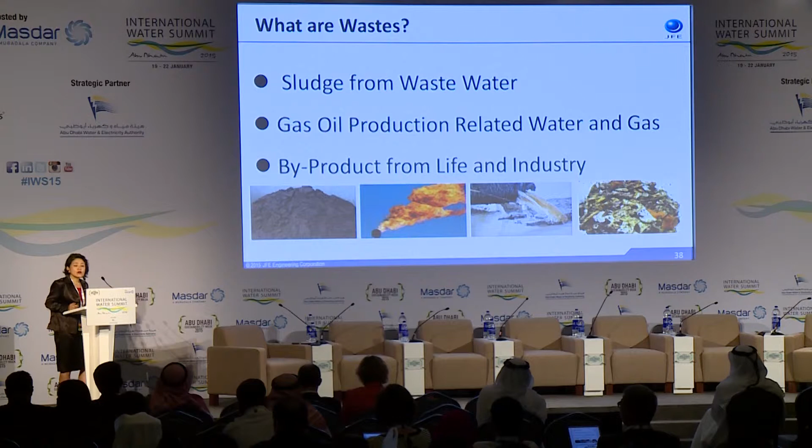So here I'd like to share with you what wastes are, as a concept in my presentation. First, sludge from wastewater. Second, gas and oil production related water and flare gas. Third, byproducts from life and industry. Those are in my category regarded as wastes.

But before going to my main presentation, allow me to quickly walk through my company. Since many of you may not have heard of JFE Engineering Corporation before, we are the holding company. Apart from JFE Engineering, we have 3 other companies with us. Our annual net sales is about $3 billion per year, and we have 7,400 people all over the world. We are the leading EPC company in Japan, with the top share in the EPC field there as well.

Our major business fields are not limited to these 6 fields, we have even more, but these are our leading business fields. I'd like to introduce them here: water treatment and biogas from sludge, waste to energy, and smart agriculture utilizing hydroponics, which we just launched last summer. We also have lots of EPC design and innovative technologies awarded all over the world, including Sky Park. If you've been to Singapore, you may have noticed the hotel Marina Bay Sands - that is our design and construction work, which has also been awarded for best design.

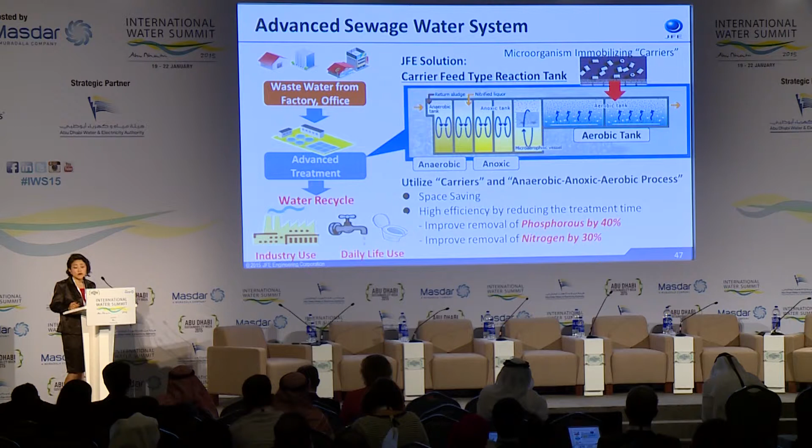In fact, dirty water and wastewater can be recycled for irrigation or industry purposes. This chart shows our reference case, the Iriezaki plant in Kawasaki City. There, we use microorganism-immobilizing carriers and an anaerobic, anoxic, and aerobic process. With this system we have achieved removal of phosphorus by 40% and nitrogen by 30%. The recycled water from this plant is used in the production line of a paper manufacturing factory.

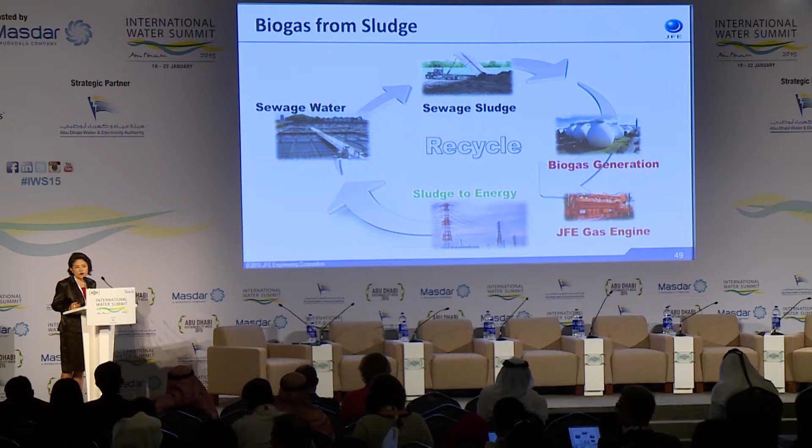Here is sludge management. I heard that in this country, sludge is maybe not utilized for electricity generation. But in Japan, since we don't have enough energy resources ourselves, we try to utilize every type of waste as an energy resource. In terms of sludge, this is a reference from our Yokohama plant, located very near our office. In Japan, 70% of sludge is recycled for generating power and electricity, and my company, JFE Engineering, has the top share in Japan for this.

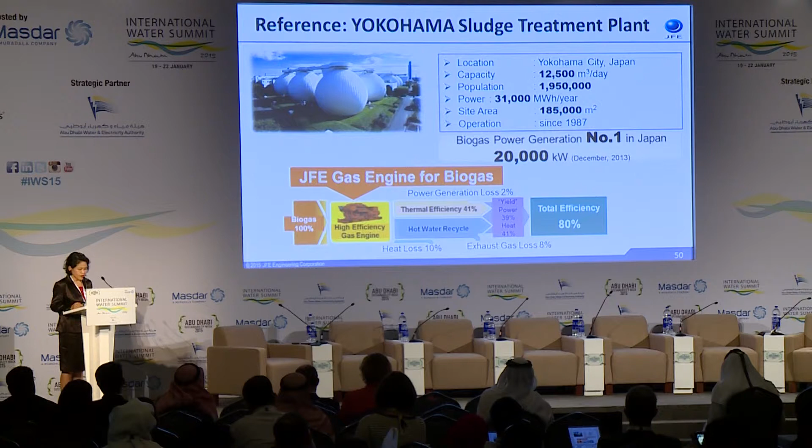These wastes actually consist of several types, including medical waste or chemical waste. In Japan, we segregate waste into different types: non-combustible and combustible, or recyclable items like newspaper, magazines, steel cans, glass bottles, and plastic bottles.

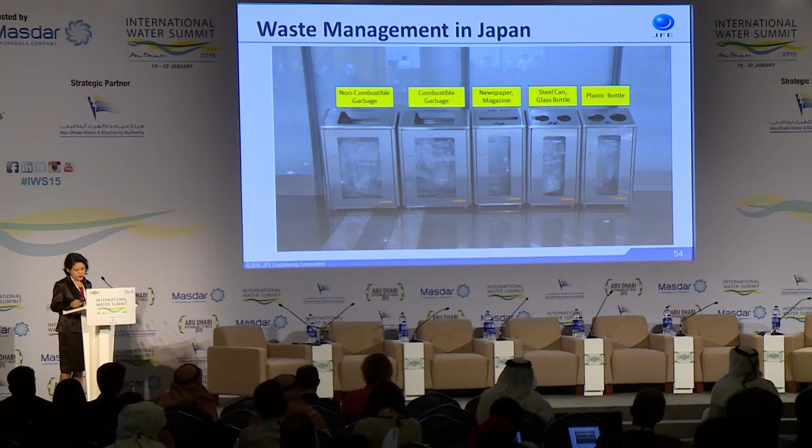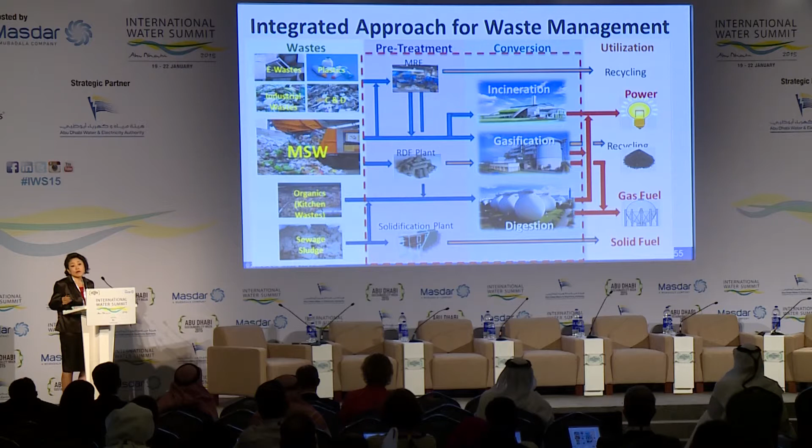How do we approach waste management itself? As you can see here, recyclable wastes go to a pre-treatment process and then through the recycling process. But for combustible waste from municipal solid waste, we either incinerate it or gasify it and use it to generate electricity. In terms of organic or sewage sludge, we solidify the waste, and then either digest it or, after carbonizing the solidified waste, use it as solid fuel for thermal plants such as coal-fired plants.

This is one of our references, the Nagaoka biogas power plant. We treat 65 tons of waste per day and manage to generate 12,300 kilowatt-hours of electricity per day with this plant. What we achieved with this is $35 million in cost reduction over the next 15 years, and we generate 4,100 megawatt-hours per year of electricity. In total, we are reducing 2,000 tons of CO2 per year.

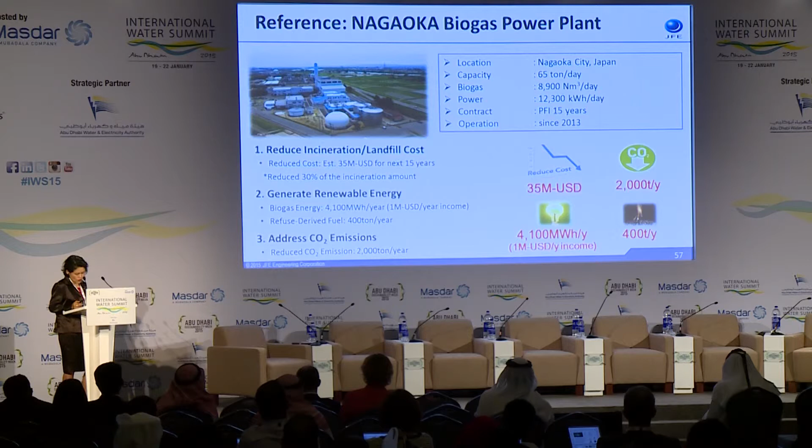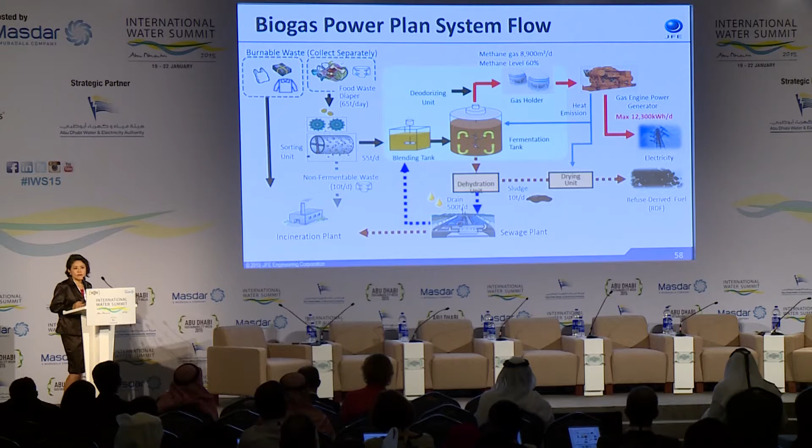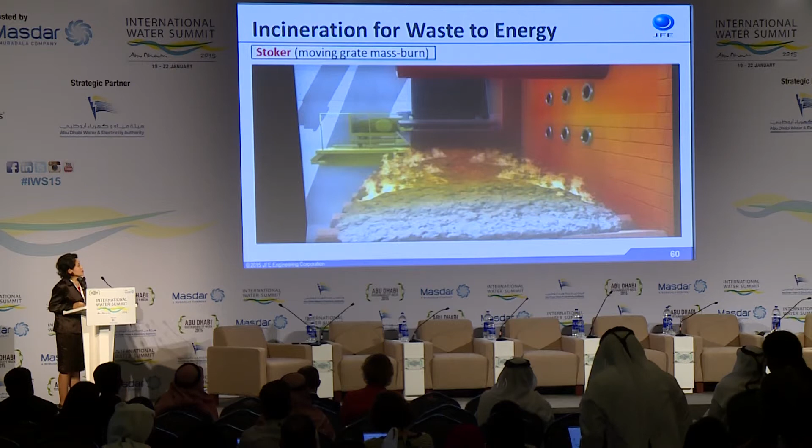This is the new project we have just launched. This is world's first multi-biogas plant. What is multi about it is that we combined food waste, sludge, and human waste into one plant system. Normally those three types of waste are dealt with in separate plants. But what we do is combine them together, therefore we can maximize cost reduction by 20%. At the same time, CO2 reduction can be achieved of 3,900 tons per year.

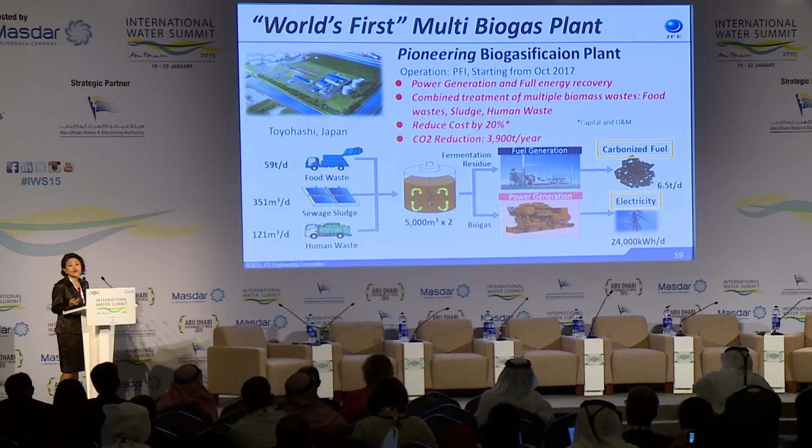We use the biogas, after treated again, for electricity purposes, or the sludge will be carbonized as a fuel to be burned in a thermal plant.

In case of incineration and gasification, we have very highly innovative technologies. We have a gasification plant under our list. This one is very unique because in terms of gasification, you don't have to sort the waste. We can put every type of waste, including hazardous waste, into the plant, and we melt it at 1,600 degree temperature. This is a pretty high temperature, and there are only 2 companies in the world that can manage this temperature gasification process, and one of them is us.

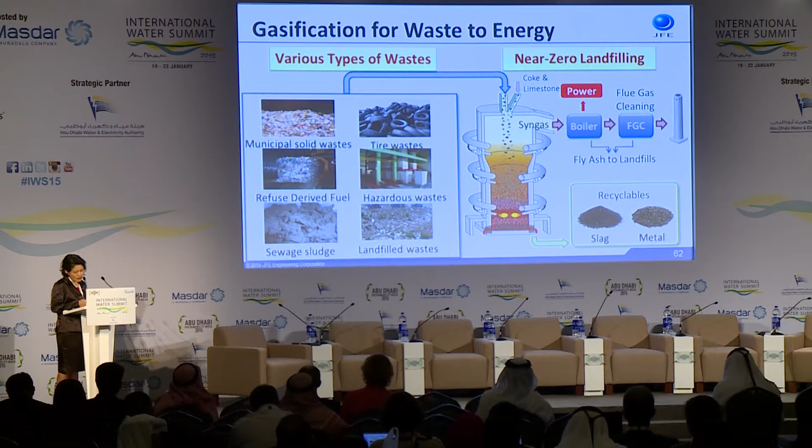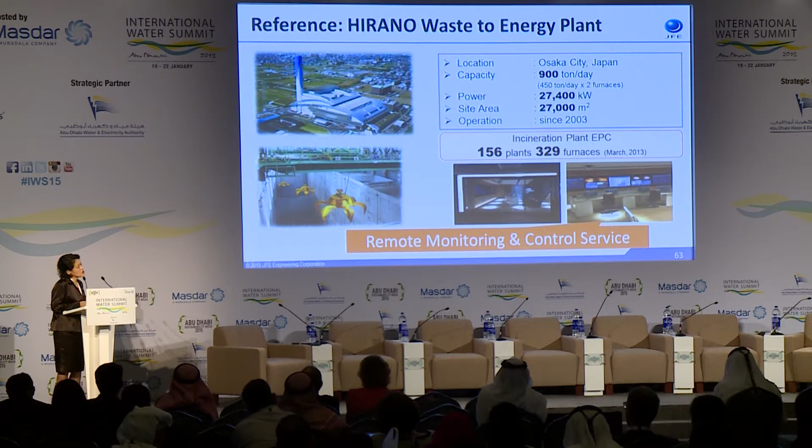We also have an incineration plant in a place called Hirano, Osaka City. This one is unique for us because we managed to integrate the data set to make remote control possible, not on-site but from off-site, and therefore we do not have to station staff on-site. What it means is that we can economize the total operation value, and also have a very efficient detection system and monitoring system remotely.

So those are the waste management solutions. Here I'd like to share with you gas and oil produced water and flare gas management. I believe that this water, especially in water-scarce regions like the Middle East, would be badly wasted after being used for pumping oil and gas.

Our proposal is to reuse it, and I'm sure lots of people have already proposed the same idea. But what is good about recycling this water is that we can use it for irrigation or industry purposes. We have an oil-produced water treatment system, not only using an evaporator, but also a reverse osmosis membrane. After treatment, we get desalinated water at about 87%, and concentrated brine at about 13%, which can be used either for incineration or generating electricity.

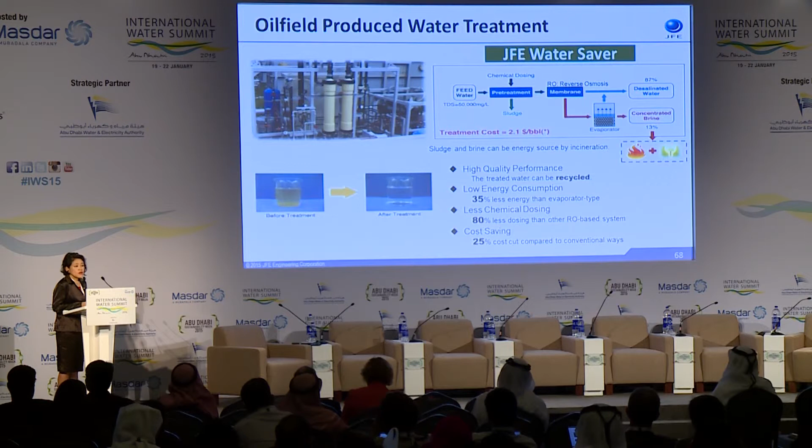With our system, we achieved low energy consumption, reduced by 35%. We also achieved less chemical dosing, reduced by 80%, compared with other companies' systems. Altogether, we managed cost savings of 25%.

So what we suggest is to treat this flare gas and produce propane LPG. Or you can process the flare gas for methane and ethane, and then utilize it as hydrogen. That hydrogen, once produced, can be used for either fuel cell vehicles or generating electricity. Therefore, you can use that electricity for produced water treatment or desalination. So this would create a pretty good recyclable management system for this flare gas.

So these are the capabilities that JFE Engineering has, and our technologies have already been demonstrated and deployed all over the world. However, we do not stop at this point. We would also like to utilize modern IT technologies to create a smart operation system for these utilities and hardware facilities and plants.

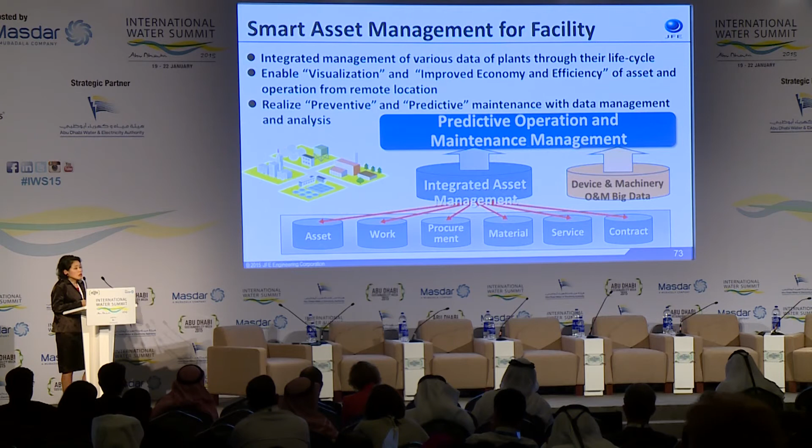By detecting anomalous behavior, you can predict that some event will happen with a facility or plant. Before the big event or incident happens, you can fix the machinery, plant, and facility well in advance, therefore minimizing damage. Because if an event happens on the utility side—water stops or energy supply stops—the damage to society is massive. To prevent that, this data combination with asset management is very important, and we call it predictive or preventive operation and maintenance management.

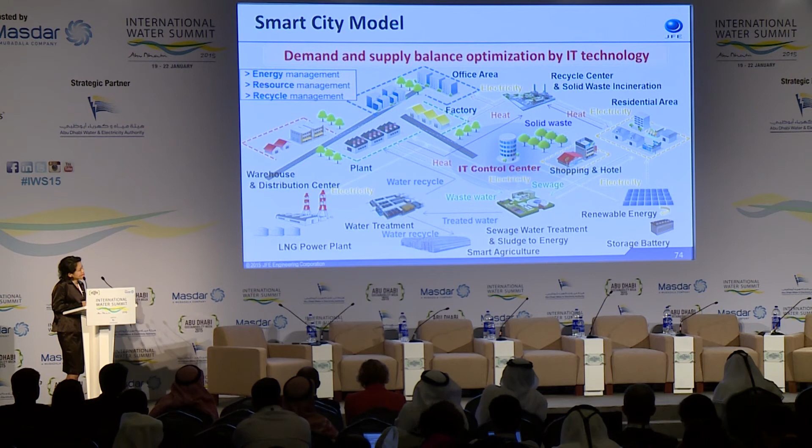So we try to provide an environmentally oriented service model, not only EPC itself, but also operation management and service. For this, we try to incorporate IT technology into our business delivery. Since IT can optimize demand and supply balance, we can also integrate town operation and service management, and biogas and biomass production from waste and O&M can be optimized.

The power generation plant's operation can be managed in mass. Also, in terms of water treatment and recycling, we can achieve it with great economic efficiency.

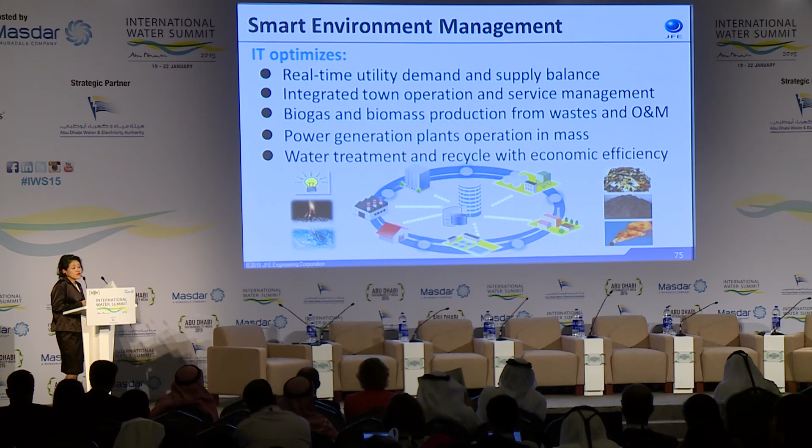For that, we need to replace the conventional business model with advanced environmental technology. We need to improve data management by utilizing the latest IT technology for facility, plant, and city operation. We need real-time data transaction between demand and supply for better utility optimization. In the end, we can realize CO2 reduction and conserve the environment, achieving sustainable development and growth of Middle East countries.